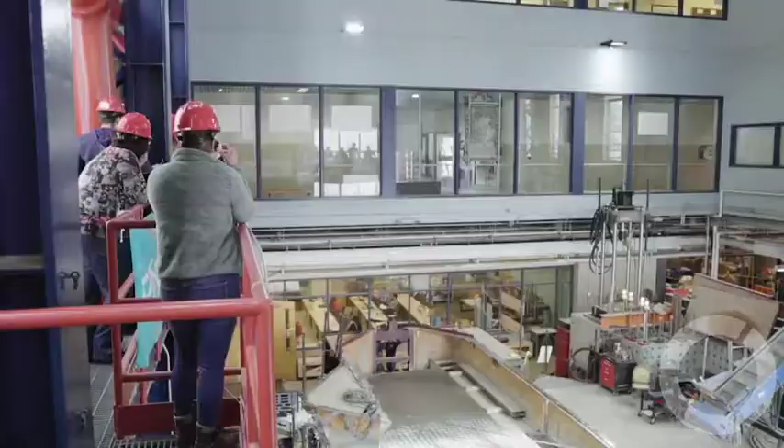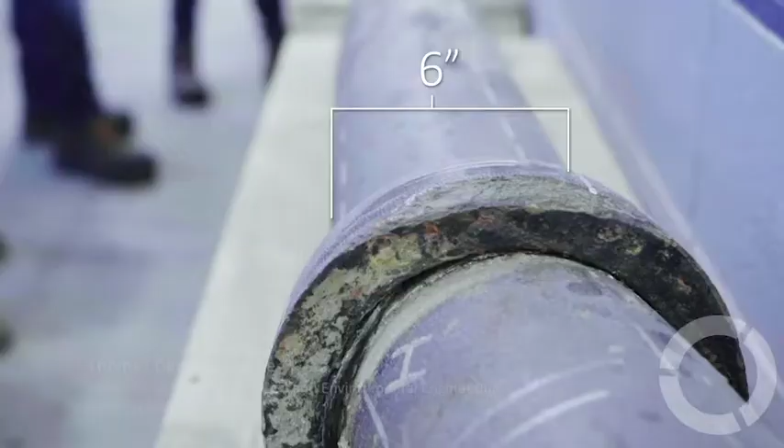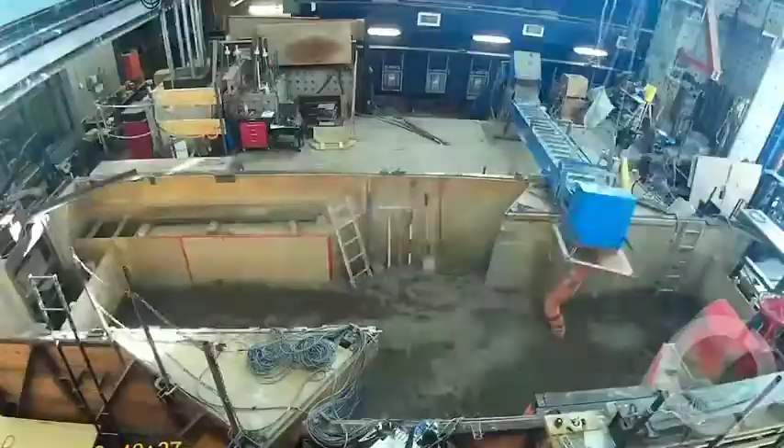We actually performed a fault rupture test on a 6-inch diameter iron pipeline, and it's lined with Sanexen Aqua-Pipe generation 2. So we have something like 138 or some odd instruments attached to the pipe. We then filled it with soil, and we ran a fault rupture test.

So, for example, if we test a pipeline system, we typically will test a very convenient and universal sized pipe, something on the order of 150 millimeters, something of that sort. And we'll run a series of tests on it. We also, and I think this is unique to our lab, are able to characterize the performance of a whole variety of different underground facilities. And we're also able to analyze those.

We have various modelers who can model the performance of these systems so that when we do large-scale tests, we actually can convert what we know from large-scale into numerics, so we don't have to repeat the test. We can actually take the data that we've generated and come up with models that people can do engineering and analysis for. In addition, we also model large systems.

For example, we were among the first, in fact, I think we were the first to develop what we call a hydraulic network model for water supply. That was in San Francisco. We actually worked with a couple of firms and the fire department in San Francisco, and were able to model what they call the auxiliary water supply system. And they made some policy decisions and some planning decisions based on what we did.

And based on what we did, the fire department was able, with our assistance, to put the fire out in the Marina in the 1989 Loma Prieta earthquake. Since that time, we've actually modeled the entire 10,000 kilometers of different pipelines and couplings and connections and different types of tanks and reservoirs for the Los Angeles Department of Water and Power. And they've made some policy decisions based on the large models that we've created for them too.

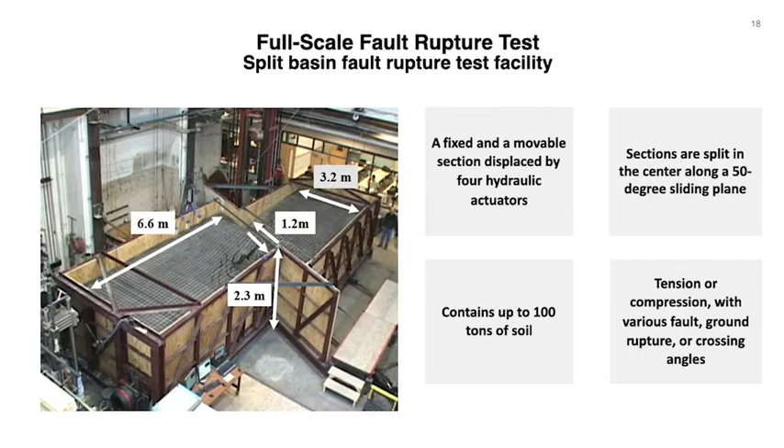And we've been particularly excited about the work that we've done with Sanexen, with the liner products and so forth. They've been extremely good clients and very, very helpful and useful to work with. We've learned a lot, and hopefully Sanexen has at the same time.

No, we surely did. Tom, before we get to our main topic, I understand that the Brooklyn Union Gas work eventually led to pioneering work on cured-in-place lining methods for gas, which was probably the first resilience assessment work done in the world, I believe.

Yeah, the gas industry became quite interested around 1998, 2000 in rehabilitating pipelines in situ. And we ended up testing a Starline 2000 lining. It's a cured-in-place pipe liner, not a cured-in-place pipe like Sanexen's product is. And we were able to characterize and test that specific lining so that they could line cast iron mains parallel to excavations for sewers and water lines and so forth.

And even though those wouldn't generate a lot of lateral movement, they would generate differential settlement or differential movement, rotation between the joints. Not a lot of axial extension or contraction, but some differential rotation and settlements. Those materials we were able to validate and get into practice for people. And that's to close the loop.

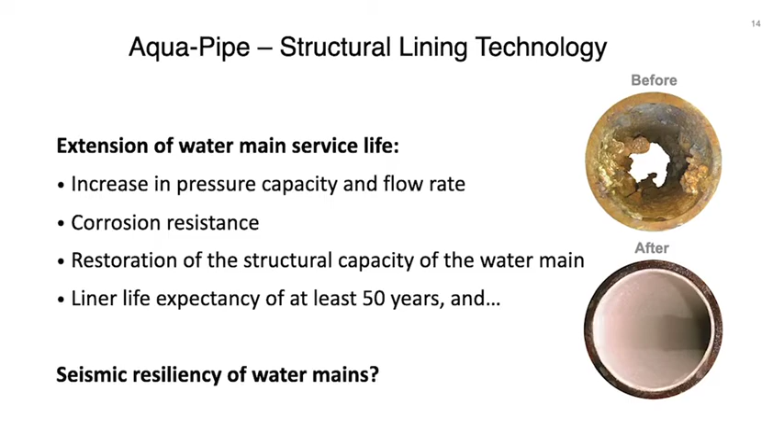No, a freeze-thaw cycle that we get in our cities, Montreal, Winnipeg, Toronto, has those all the time, actually more than other places prone to seismic events, although those movements are less important, but still quite significant. And our product has that ability to withstand very significantly that deformation, that strain that's imposed by the surrounding of the pipe. Most, if not all, of the other products that are used for lining water mains do not have that large-scale deformation capacity. So we had that data, but it was kind of highly empirical, non-controlled, yet third-party and independent. We needed to go the extra mile and get something that's recognized.

And as time went on, we were talking in particular with Los Angeles Water and Power Department. And they told us, well, you claim that, you need to assess it with Professor O'Rourke. And their seismic or earthquake resilience expert over there, Craig Davis, and Tom were instrumental in getting us that old program that we launched at Cornell.

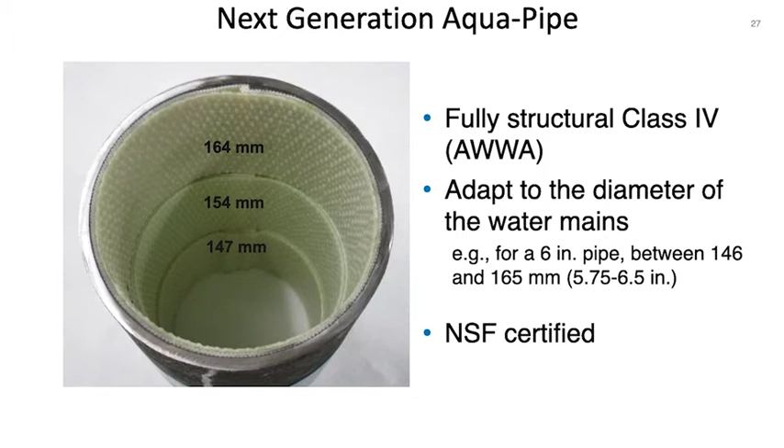So we're talking about basically testing the adaptive capacity of a pipe. Exactly. So we had that old set of data that's about 5 to 7 years old at least. So we decided to take our technology and improve it even more, and get to our next generation of Aqua-Pipe, where we have a product that's able to adapt to the internal diameter of a pipe, conforming perfectly to it, while maintaining the resiliency and even improving it. And we went to Tom to make that demonstration. And perhaps, Tom, you could complete on how this was tested at your facility.

Yeah, I'd like to maybe expand on one point you made, Martin, and that was that large movements occur not only during earthquakes. You may get them from freeze-thaw cycles. Of course, Canada is subject to freeze-thaw, all utilities in Canada. And similarly, in New York State, there's a lot of freeze-thaw activity that goes on. But we actually call our expertise an expertise in hazard resilience. So not only are we going to advise and do testing to reinforce products to be earthquake resistant, but we're gonna do it to make them hazard resistant.

So some natural hazards that cause differential movements are hurricanes. Large flooding events cause regional subsidence and actually have washouts, undermined pipelines, cause movements that something like a lining system can resist, and therefore they can perform after the hurricane and not have to be replaced as quickly or replaced at all. So that's one part of hazard resilience.

Other parts of hazard resilience might involve mining subsidence, might involve construction from tunneling or adjacent excavations, which often cause ground deformations, and might actually involve growth faults, regional subsidence from withdrawal of water. For example, in Arizona, they actually have normal faults that develop at various locations in the groundwater basin there and cause concentrated deformation, because as they withdraw the water, they're causing regional subsidence, and that regional subsidence manifests itself in terms of local differential ground movement that affects whatever is buried in those particular locations. So there's really quite a lot of sources of permanent ground deformation.

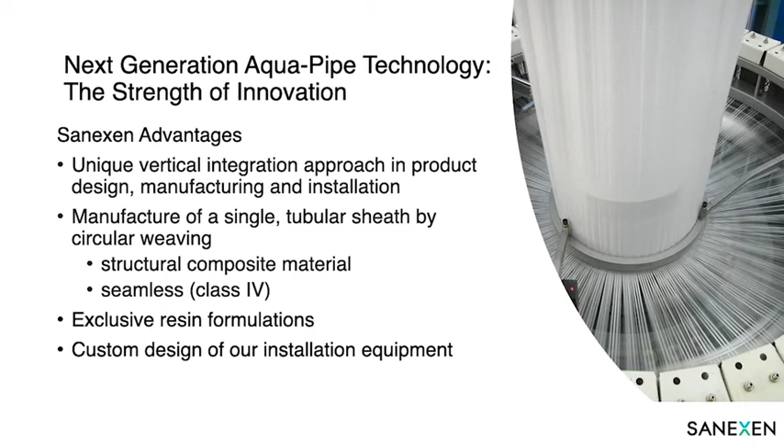And we combine all of this work with respect to ancillary deformations, and we numerically use that information in a model of a big fault rupture that we do before we do the actual fault rupture test. The fault rupture test is quite complex, and therefore we have to give it a full numerical analysis ahead of time using the results that we've gathered from the other tests. And we did that. And we get an idea for how much deformation can be sustained. And then we run our test and we see how much deformation is actually sustained. So there are things we can do in terms of prediction, but there's things that we can't do in terms of prediction. Only a large-scale test can do those.

Once we have the information, the data from the large-scale tests, we can refine the numerical models in the way that they need to be refined and therefore can substitute numerics for actual testing in the future.

So, by the way, before we ran the large fault rupture test, I remember you had some internal predictions on how far we would go, which you never really shared. You gave us an idea, but there was a cutoff point that you thought we may not have crossed, let's say. Can you tell us a little bit about that? What did you expect, and how did those predictions pan out?

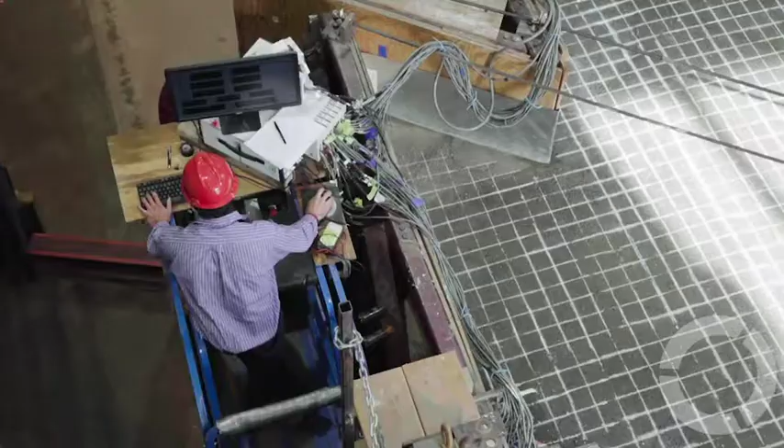Martin and I were standing there watching it from the overhang, looking at the test from above. Well, according to our analysis, it should go all the way, except we have no idea how much rotation and axial pull the liner is going to take. Right. Eventually, it's got to go. Eventually, it has to. Okay, you've now surpassed IPEX. Pretty exciting. This is the largest displacement that we've imposed during our testing. You now are exceeding everybody.

We thought that maybe the lining system with the existing pipeline could tolerate on the order of about 2 feet, 0.6 meters of displacement, a fault movement. We typically run fault movements anywhere from 0.3 meters to 1.2 meters. We typically have a limit at 1.2. We could actually test to about 1.5 or so, but the way the box was configured, we'd have to move everything around. So typically, if we can get it to go through 1.2 meters of fault displacement, then we can model the large scale movement behavior with respect to the pipeline.

I'm sorry, Tom, to cut you off, but I don't want this to get too technical, but that cutoff line of 0.6 meters really depended on the adhesion level and the ability of the interface between the liner and the pipeline to propagate. Yeah, it really depends upon how much you can transfer stretchability to the lining system without causing forces that cause a rupture of the lining system.

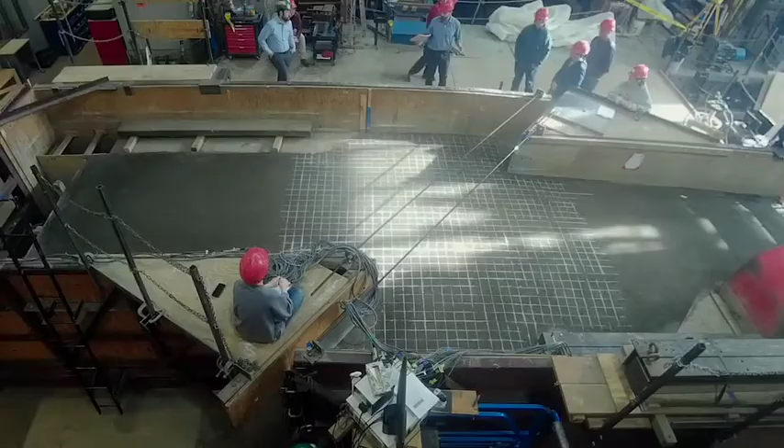So basically, the lining system for Sanexen, and I suspect you'll talk about this, Martin, but we used what's called an Aquapipe Generation 2 lining. That lining was able to detach itself from the pipeline, still maintain pressure and flow. One of the things we do in our tests is we run them at the water pressures that are actually operated when the systems are in performance. So we're one of the few labs that actually can do these tests and do the measurements with the precision and acuity that we're able to achieve, while the pipeline's under pressure.

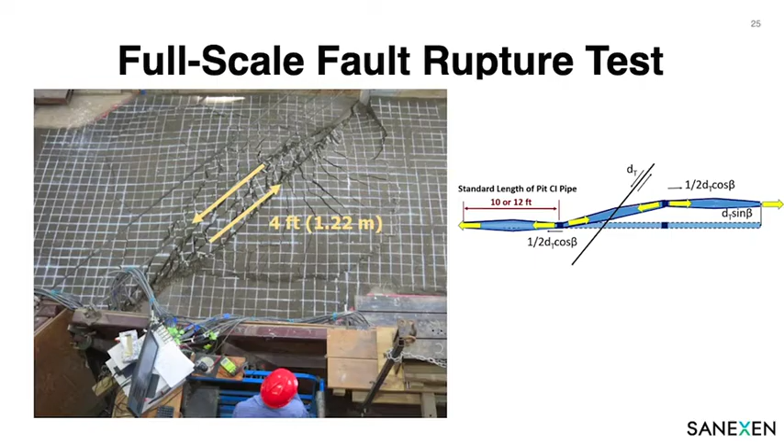So we actually exceeded our 0.6 meter. We took the Sanexen system out to the 1.2 meter limit. We couldn't push it any further than that because of the limitation of the setup. That's right. And we were able to determine that the lining itself, on average, had stretched about 6.3 to about 6.5%. It's a fairly large percentage. And it hadn't shown signs of achieving failure force, where the forces that we measured were a maximum of about 30 kips, 30,000 pounds. And our estimation of the lining capacity was set at about 62,000 pounds. So we were well under the force requirements, and apparently we were under the deformation requirements.

We had measurements that showed us exactly what the joints were doing, because the pipe pulls apart at the joints. As it pulls apart at the joints, the lining emerges. If you imagine, a pipeline actually gets larger in its longitudinal direction, and as it stretches or gets larger, it can't stretch on the iron. It has to stretch at the joints. And the joints literally pull apart.

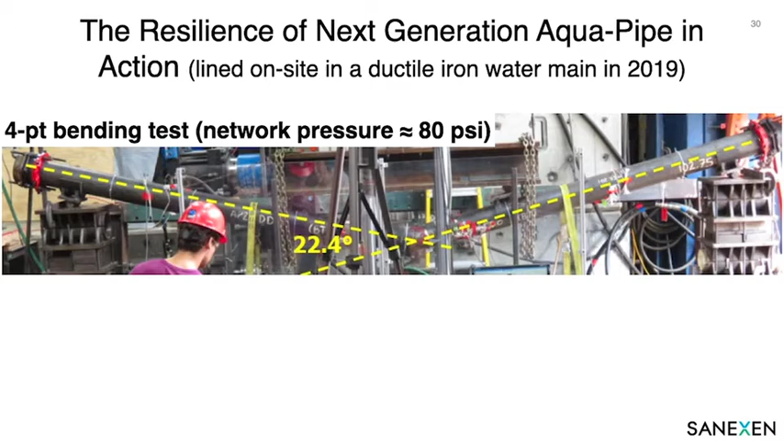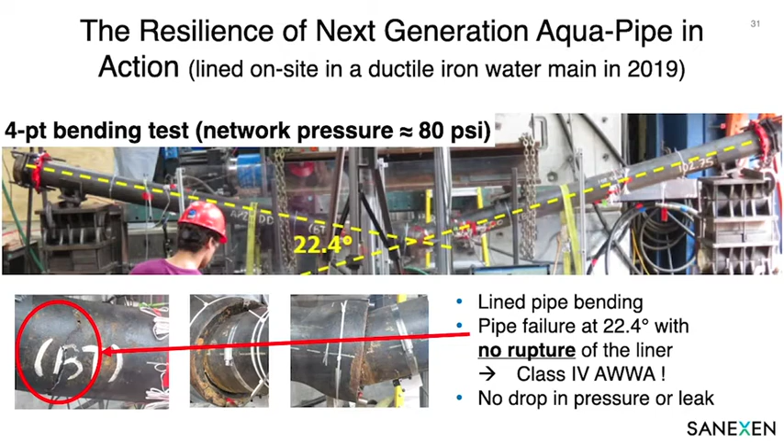And the lining emerges from the joints, and the lining has to take that stretchability, the force and the deformation capacity, and it has to rotate at the same time, because we actually do tests that cause the pipeline to extend and rotate. So it had to take both of these deformations, and it did it, and we measured it precisely. So not only do we measure it with our instruments that are getting measurements that pertain to the performance of the pipeline while it's being deformed, but after the test is over, we leave the deformation in the soil box and exhume or expose the pipeline.

And then we have a special laser system, a Leica system, that actually runs lasers and measures the relative displacement of the pipeline. We take a measurement before we even bury it. And then we take a measurement afterwards, because we excavate it very slowly. And therefore we can determine after the fact what the final deformation was. That should obviously conform to what our measurements are telling us for the final deformation.

The measurements do much more. They actually give us the full development of the deformation, but they should at least conform to what we're able to measure in the Leica system. And they did. They did quite well. There was very, very good compliance between all different measurement systems.

Have you seen that kind of performance in other products on the market? I mean, we typically don't expect that a pipeline system will sustain the full 1.2 meters of movement. And to perform well, they don't have to. But this particular product performed very well, and it did sustain that deformation. It could have sustained more.

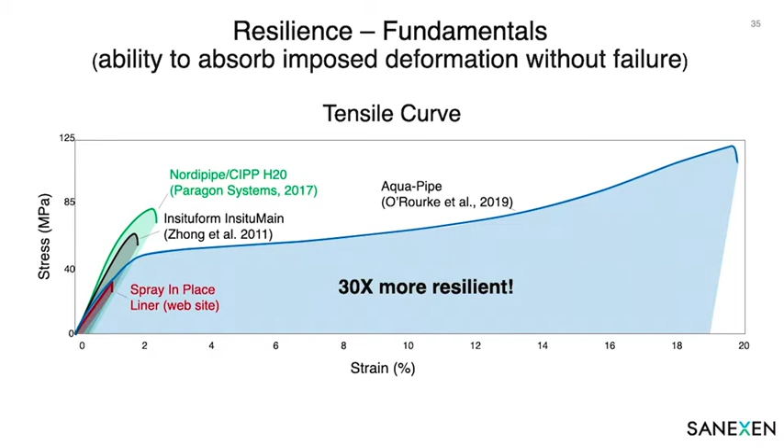You're referring with previous testing to brand new water mains and not lining materials, are you? There are a number of systems that have been created to be able to move at the joints and therefore go through some of this deformation that I just talked about. And we tested some of those systems.

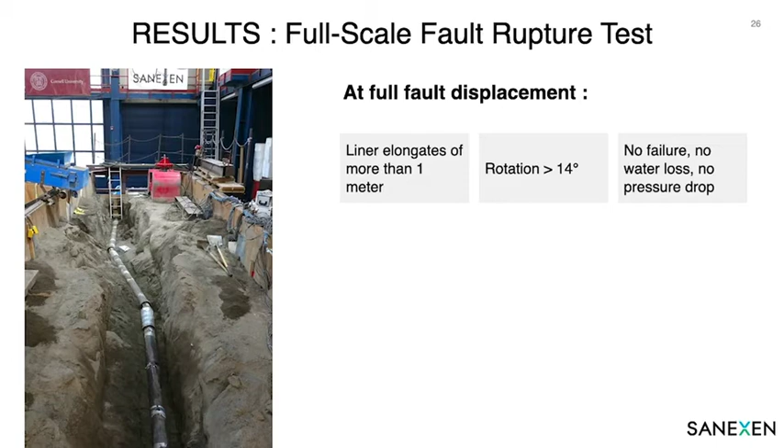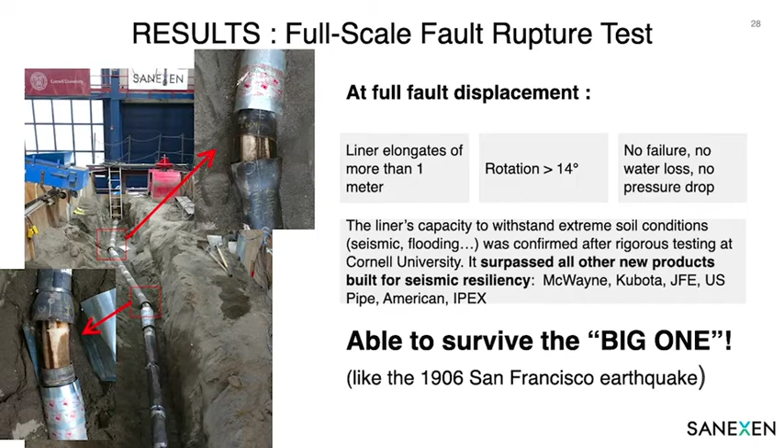Before we go back to our original topic, Jason, a scoop for you, Tom. We last week finally received the testing on the coupons from the joint that were pulled out during the fault rupture test. And the results are clear. There's no significant difference from a statistical standpoint with respect to design specification of the product. So it looks like it's unaffected. I'm amazed. Yeah, no, it's really like brand new.

What we did in these tests, again, Sanexen is committed to high performance and quality. And we actually, when the test was over, cut up the pipeline and took out samples of the lining and samples of the pipe and sent it to Sanexen. They wanted to perform their own tests to substantiate and back up some of ours.

We also had our testing people go into those pipelines and measure the pipe wall thickness and the liner thickness at several different locations, so that we could confirm the dimensions associated with the lining at several different locations along the pipe, and the dimensions of the pipe at several different locations along the pipe, and those have been confirmed. So not only was there follow-up testing, but there were follow-up measurements.

And one of the measurements that's performed during the test is the lining that gets extruded at the ends of the box. And this is the same lining that's been put in the pipeline. And we take a portion of this extruded lining and it goes to Sanexen for testing, it goes to Cornell for testing. And those tests confirm the behavior from other tests that we have of the lining. And it's actually the results of those tests, of the same lining that was tested, that we put inside our models to be able to interpret and understand the test results.

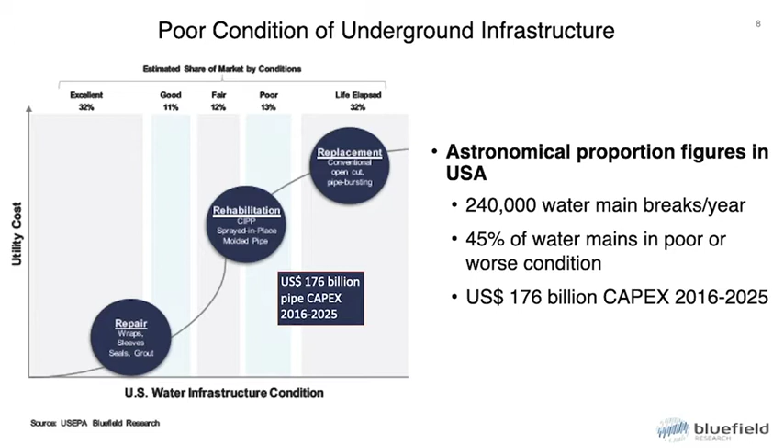Late 90s, the city of Montreal comes to Sanexen. We have that huge problem with our leaking water main infrastructures. It's flooding our sewer system, and it costs us a fortune to both get potable water distributed and then treat that water that's flooding the sewer system downstream at the wastewater treatment plant. So we, being a technology developer, a technology provider with intimate know-how and knowledge of the environmental issues that we need to address, developed this Aquapipe product.

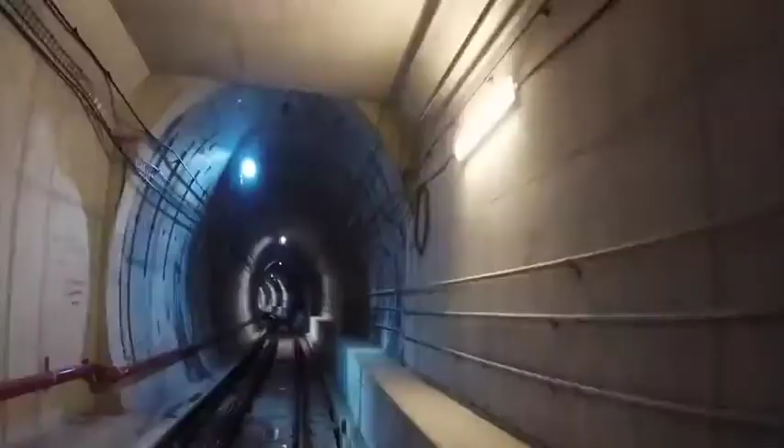Now, nowadays, we're being asked by cities and water utilities. The first question was from Toronto, in their subway extension construction projects. They had a 12-inch water main, and they have a new tunnel that goes underneath. And they say, we can't dig.

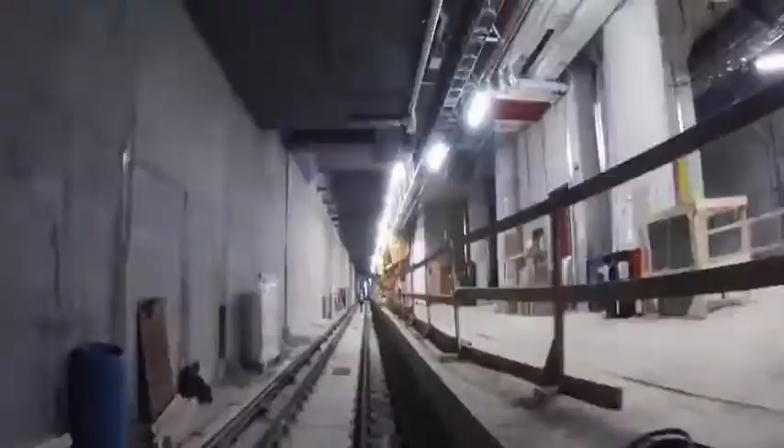I mean, there's buildings, we're slightly outside downtown, but in a dense area. What can we do to prevent that pipe to subside? Well, put Aquapipe in. And so we did some testing, and that led to demonstrating that this was able to withstand all those outside constraints or conditions.

Now, going to the United States, and especially on the West Coast, they heard about the resiliency of our product, but they want us to do more than showing good results on a small testing bench. And so we started a big program in the last 5 years to make our Aquapipe product even stronger and come up with the demonstration that they needed for them to use that product to introduce into their pipeline rebuilding programs.

LA has a big one, San Francisco, East Bay MUD, and a number of cities along the West Coast, San Diego, Los Angeles, Las Vegas in particular. And that's how we got to develop that. All large cities, basically, that are quite prone to earthquakes, if I understand correctly. Obviously the larger utilities have larger budgets and larger liability as well to address, and their asset management program is generally far more developed. All those smaller cities have their own.

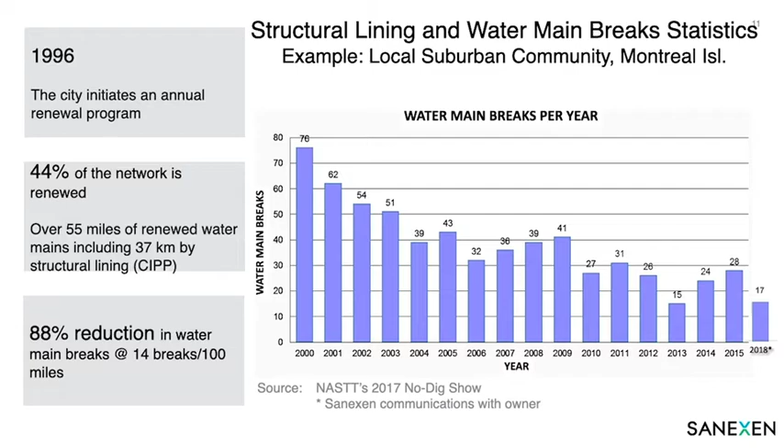A suburb city close to Montreal that's called Dollard-des-Ormeaux, I must say, in the past had huge issues with its water main network and the water main breaks. And they did pioneering work with us to use cured in place pipe and Aquapipe to address those issues. As a matter of fact, they've lined more than 50% of their network today. There's no city on earth that has done anything close to that.

Obviously, it's smaller. So in terms of absolute number, it's probably 60 kilometers. It's not 5,000 like in Los Angeles. But still, the statistics are very clear. They reduced their water main breaks by 88% doing so. Oh, wow. By rehabilitating, using mostly Aquapipe, not all, but like 90+%. And so we're pretty proud of them recognizing our technology and investing in rehabilitation techniques.

Were some of these larger cities that are in dire need of this type of technology able to see the results of your tests, Professor? So major cities like Seattle, like Portland, Oregon, like Vancouver, like San Francisco, like Los Angeles, like San Diego, etc., these are big cities that have earthquake performance issues, and the lining systems developed by Sanexen can resolve and solve many of these.

We also have other cities like New York that don't have such a big earthquake hazard, but as we learned, have a very big hurricane hazard, have a very big construction-related hazard. So these lining systems are hazard resilient insertions, right? So they not only provide resilience against earthquakes, but they provide resilience against hurricanes. They provide resilience against ground movements associated with urban construction, frost heave, et cetera.

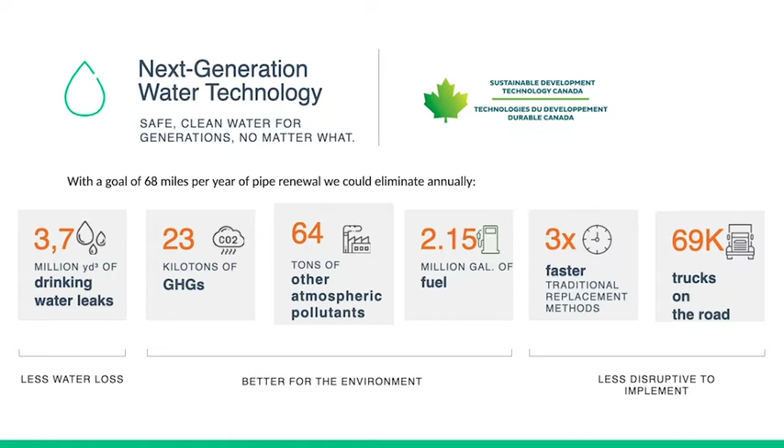It adds up to 1.1 million tons of soil. So I know it's a lot of numbers, but 1.1 million tons of soil is 69,000 trucks that are not in the streets. And obviously, when you use Aquapipe, you use it downtown, in a heavily dense, populated area, when you don't have the luxury of opening up the street, you see what I mean? So that's 69,000 trucks that are not in our downtown area.

That again, with those 68 miles that we would do in LA, that's huge impact. It's very tangible social, environmental, and economic impact using our technology. And again, referring to LADWP, we would contribute to reduce the number of breaks per 100 miles that they have. Currently, they have around 17 breaks per 100 miles. And looking at the numbers we've had with the thousands of miles that we've lined so far, every line that we would install would be resilient for years and years.

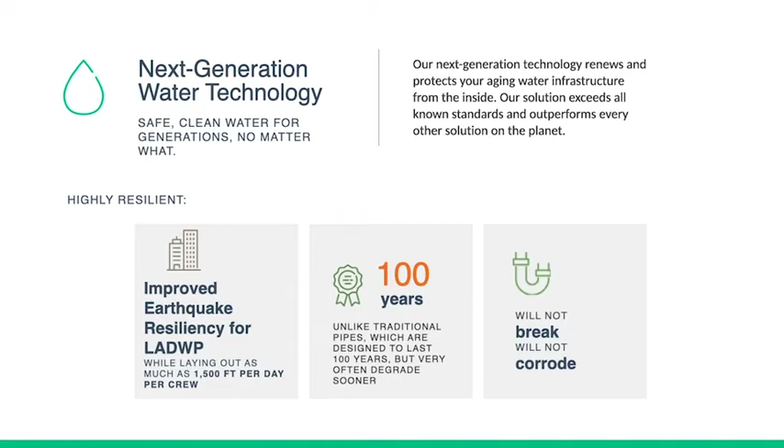We warranty for 50 years. We're working on a demonstration that it would be for 100. So every section would not break anymore. So that statistic of 17 breaks per 100 miles would reduce significantly. If I use the example we saw during the talk today, that suburban city of Montreal reduced by 88% their number of breaks per year, per mile, by using our technology. So the impact would be very, very real.

And just to finish, we do that, adding that seismic resiliency to whatever we line, at a rate of, let's say, 500 to 1,000 feet per half a day per crew. So we could do, let's say, 1,500 to 2,000 feet per day per crew of that good work. And other technologies, open cut technologies that are seismic resilient, you can install less than 200 feet a day per crew. So we're doing 10 times more than they're doing.

And with all those environmental benefits, with all those social benefits, and of course, with all that taxpayers' money saved. So there's a lot of benefit in using our technology, long-term, short-term. I'm starting to understand why you call it a game changer. It's definitely a game changer. Those results at Cornell, and thanks, Tom, were amazingly good, above our hopes. We knew it would be doing well. But that well is amazing.

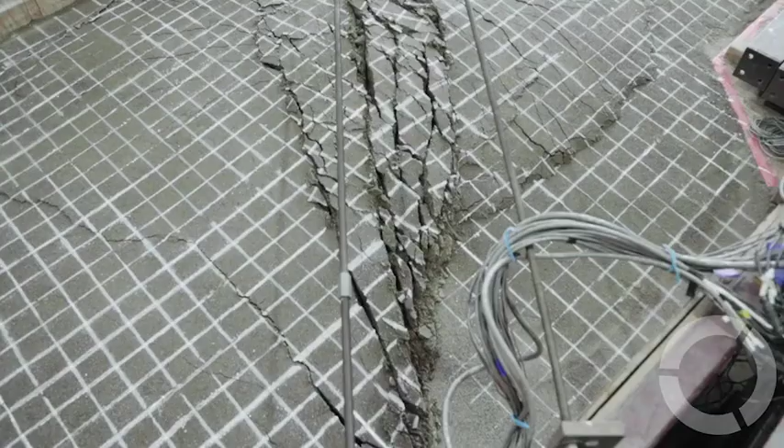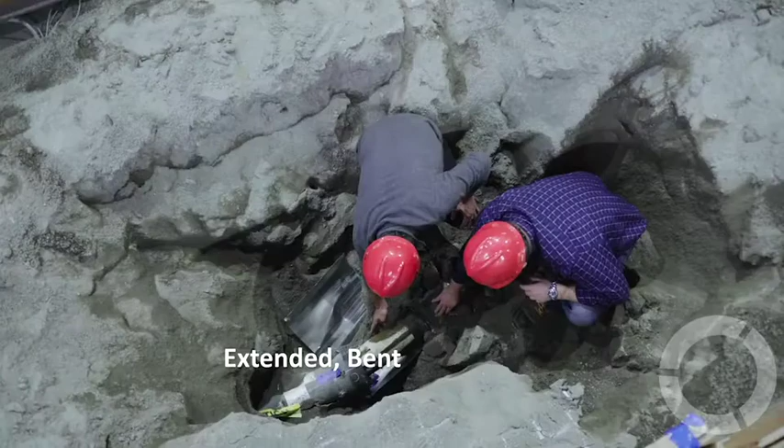The Sanexen lining, the AP2, has not failed. So it gets both extended axially and it gets bent out of plane. So the joints where the lining becomes exposed to the soil actually rotated and extended. It's as good a test result as one could imagine.

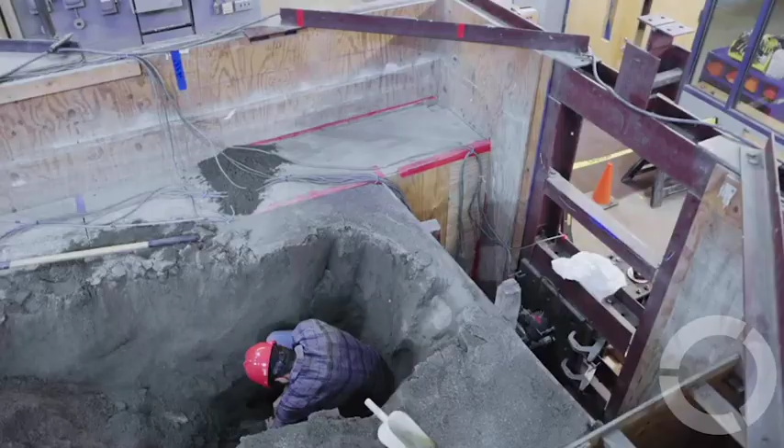So this is the only solution to replacement. So instead of opening up streets and affecting traffic for months, we access the pipe from the ends and then we repair and renew the pipeline from the interior without affecting the street.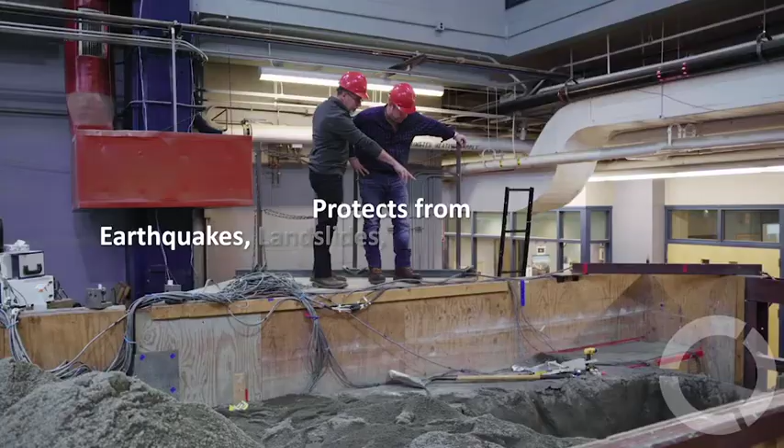Earthquakes, landslides, flooding events, hurricanes, high tides. This is a solution for it because it makes the pipe simply reliable. How much of this have you implemented already?

Into a product? Yes. We see our product as a solution for safe and clean water for generations, no matter what. You put it in the ground and that's the last piece of repair or renewal for that section you'll ever do. That's our vision. That's what we want to do. And we've achieved it. When it's only the water main you need to fix and make reliable again, well, there is a solution.

Yeah, it's just thinking of COVID here in this situation, I realize how important the lack of disruption to the community is. It's really remarkable work. I didn't realize it based on my research before speaking to the both of you, but clearly the advantages are vast. And clearly this is the right choice for any city, for any community, especially the larger ones, obviously.

We certainly believe so. And now the real job starts. We need to install that into cities and bring that great solution to all our customers.